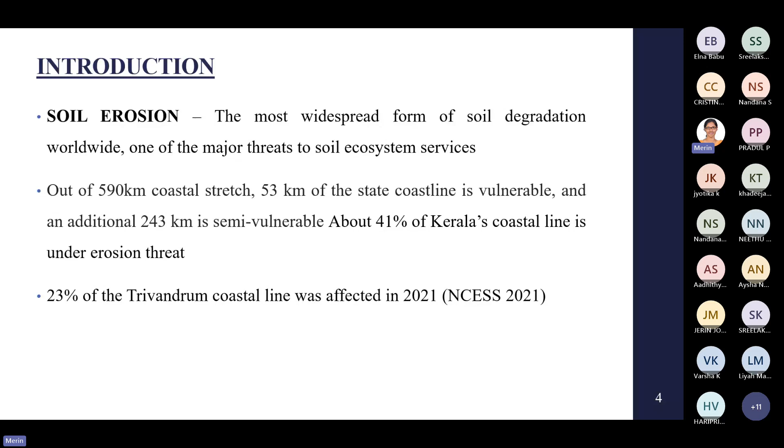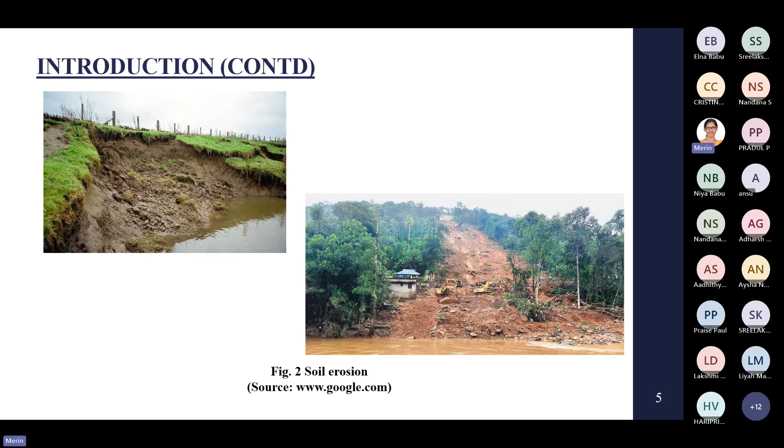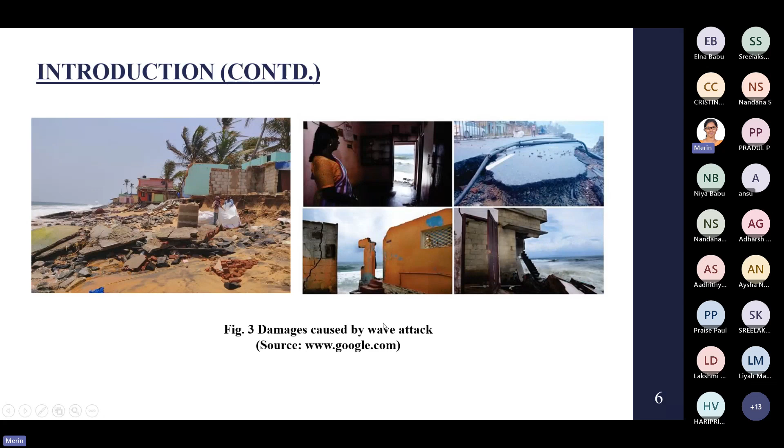Okay, firstly, when we're carrying out a study, we have to look onto reliable data. So even in our Kerala government website, we can see various erosion data, landslide data. We can identify the hotspots, like erosion hotspots and the areas which are prone to landslide, flood, drought, etc. Even in the Kerala website data itself, you can identify them. Or further, if you have to develop your studies more, you can rely on other software like GIS and so on, in order to map the locations accurately.

Okay, so the first step of doing research is actually you have to look onto data and then you have to identify the gaps. Gaps are actually what you use to develop your work. When you go through the literature, you'll get familiarized with how the works are being carried out, and then, referring to them, you can identify the gap. Suppose a particular work has been conducted in maybe the northern side of our country, then we can think of how we can adopt that in our particular region. Will it be possible? All those possibilities you can analyze. That is actually the basic step of identifying gaps.

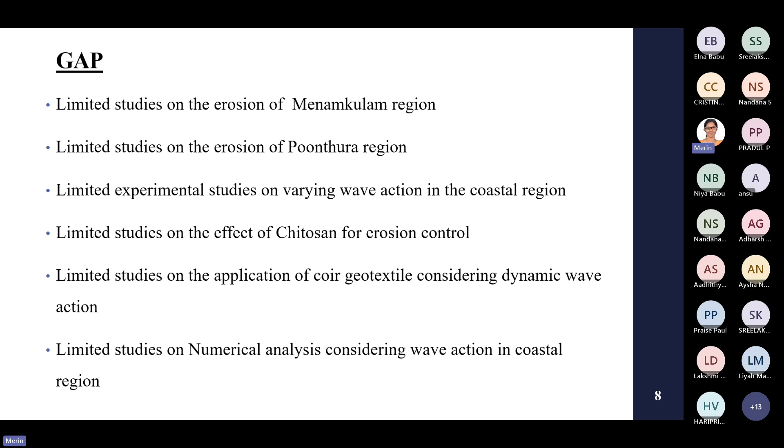So when I carried out this literature study, I came across various gaps, and these are the gaps that I have identified. I have selected two regions for my study, that is Menamkulam and Poonthura region. Both are in the Trivandrum district itself, and I have carried out my experiments on those two regions. Also, I have analyzed the effect of varying wave actions in the coastal region, the effect of chitosan and how it can minimize the amount of erosion, and how coir geotextile can be applied in order to reduce the erosion. And then numerical analysis. Numerical analysis basically is how you carry out a study with the help of software. Okay, so based on my gap, I have identified the objective also.

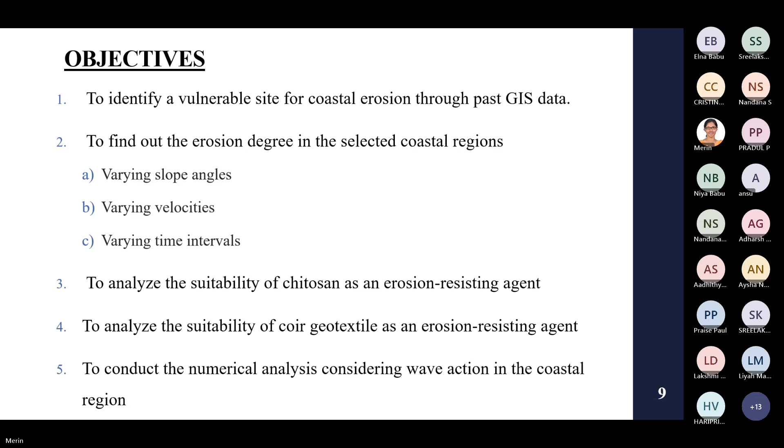Now, the materials used for my study. I have taken two soil samples from two different regions. Then chitosan. Chitosan is actually a byproduct of the fishing industry. If you want to purchase it, you can purchase through Matsyafed, which is part of the fisheries, the Kerala government itself, or any other ways you can purchase the chitosan. And then coir geotextile; you'll all be familiar with coir geotextile because it is a natural product, and similar to jute geotextile, you can use coir geotextile. And then concrete mattress; it is a mattress made of concrete. Its shape is in the form of a mattress.

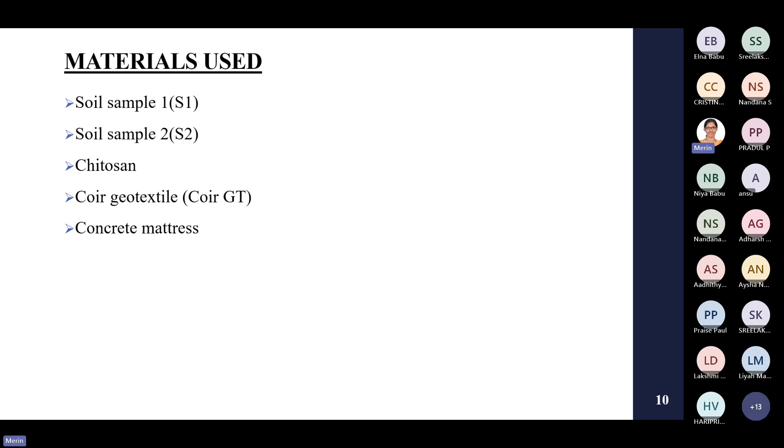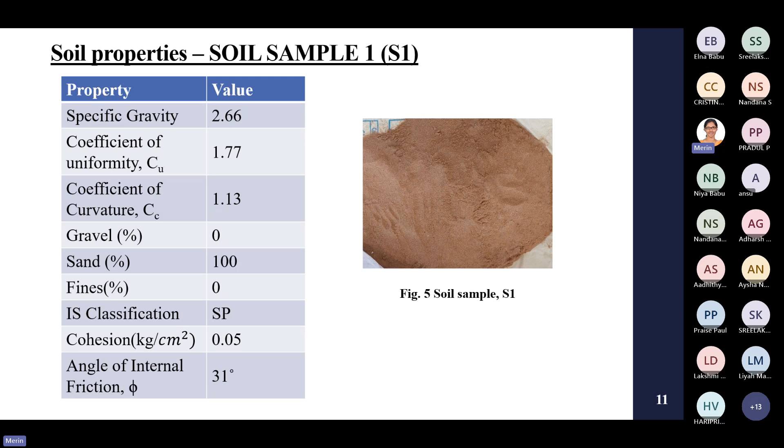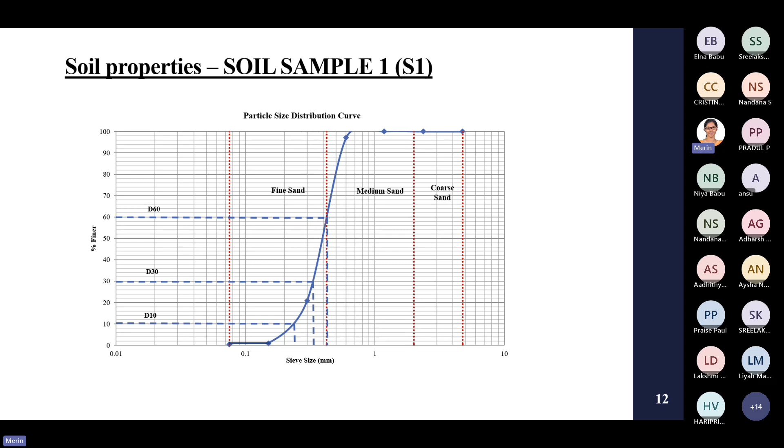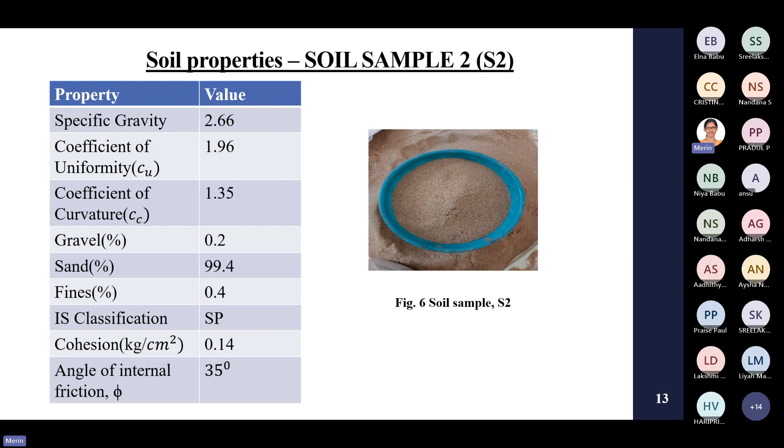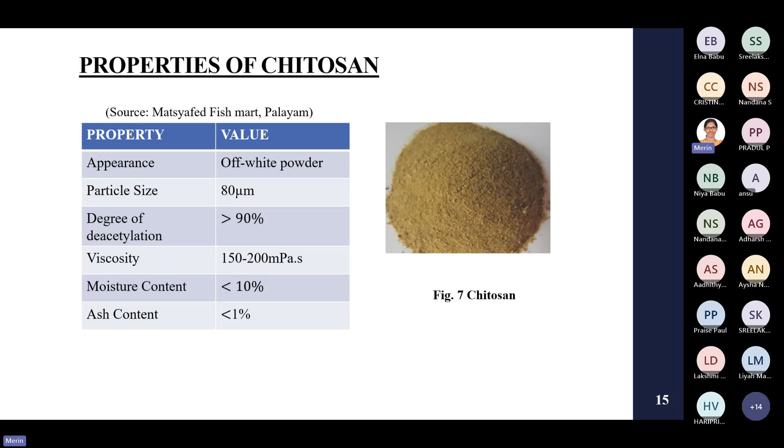So first, after identifying the gaps, you have to carry out the basic property tests, and then you have to select your materials. And for the materials also, the basic properties should be analyzed. First you have to plan your work and how you have to carry out the work. On the basis of that, you have to carry out the different tests which are required for the further completion of the work.

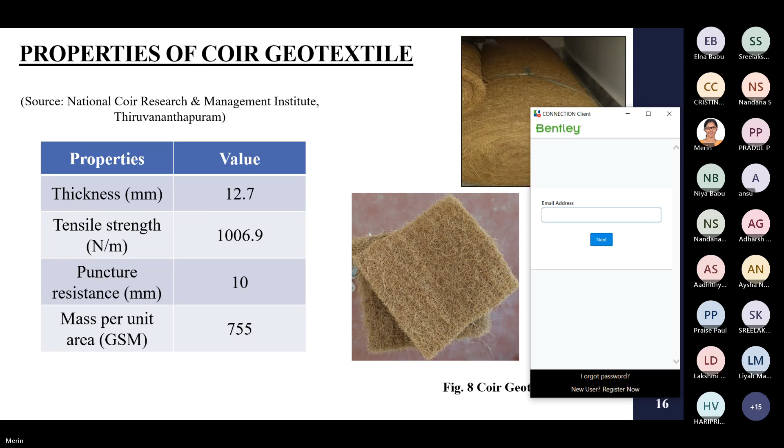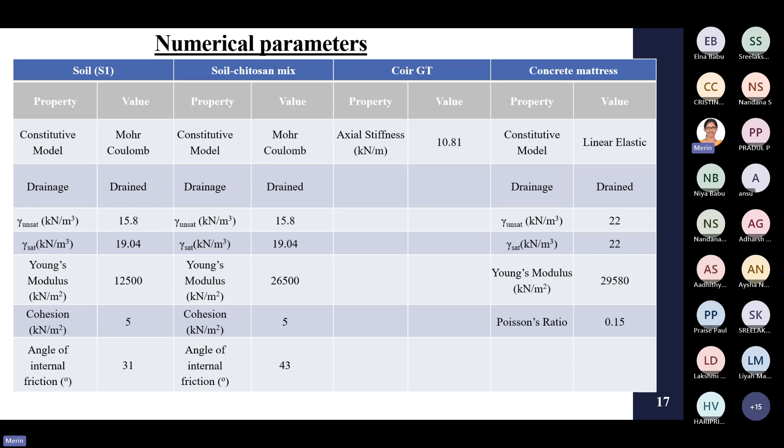Even in the work that I have done, because my college was situated in Trivandrum district, I have chosen the Trivandrum area. So similarly, you can also vary your work according to your availability and requirement. Okay, so after identifying the problem, you have to collect your materials required for the work, and then you have to do further property tests. And then if you're having any test setup, you have to prepare that. Otherwise, just follow how your work is being carried out. That way, just lead your work.

And then, since my work was based on erosion, I found out the erosion degree in untreated soils. And then the next stage was to find out the erosion degree in treated soils. Then I have completed my numerical analysis.

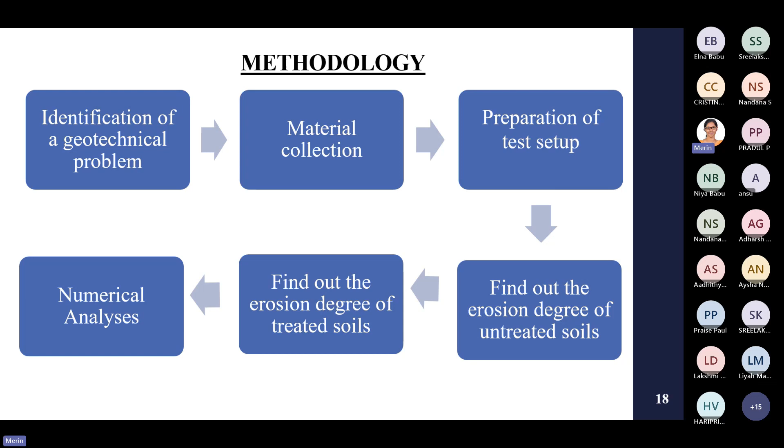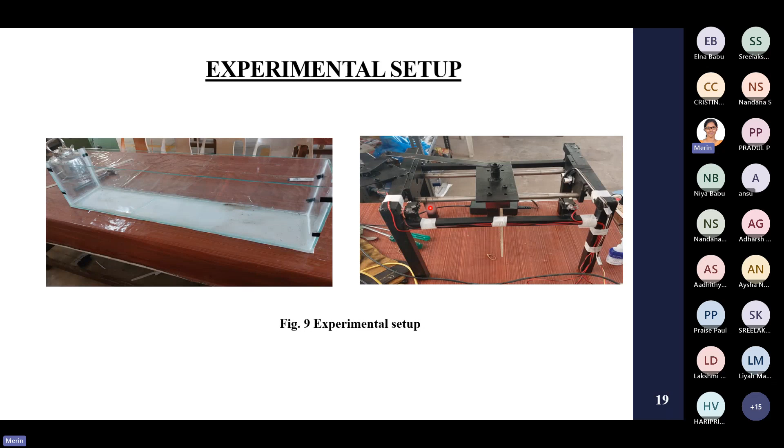And the basic methodology: I am filling soil in slopes. I have selected 3 slopes, 30, 45, and 60 degrees. Those 3 slopes I'm filling in the apparatus initially, and then I'll be filling water also. After the whole preparation of the soil and filling the water, I'll be switching on this motor, and then it will be moving back and forth, generating a wave. And that wave is used to analyze how the soil is being eroded away.

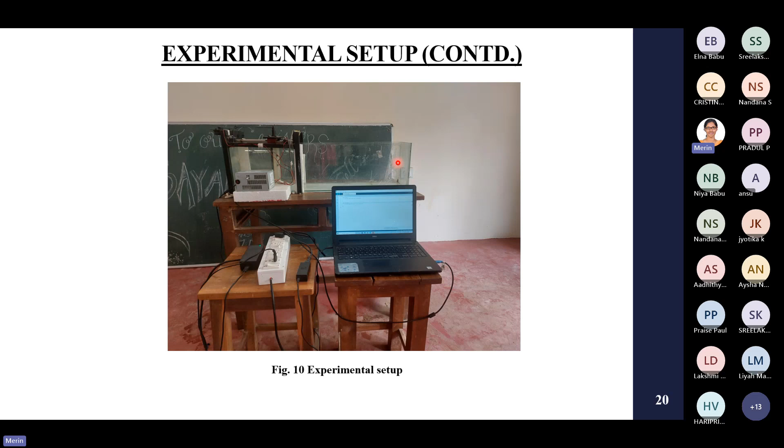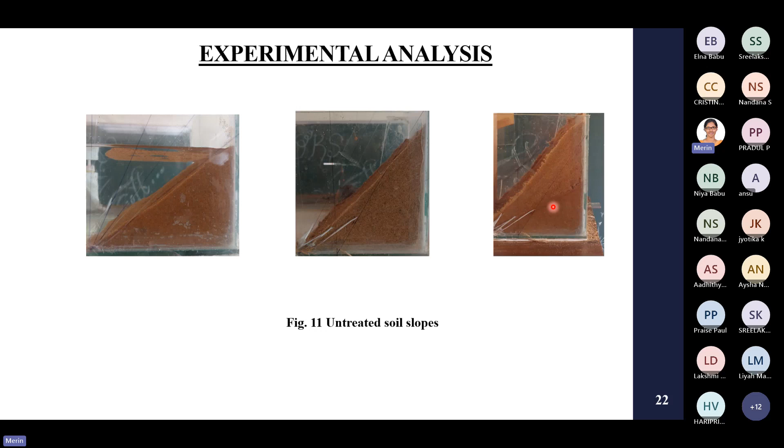So after doing the untreated studies, I moved on to treated studies, to obtain a comparison. After finishing the untreated soil samples, I moved on with the chitosan treated soil slopes. The chitosan which I showed you before was mixed with the soil sample in an optimum percentage. In any case, the optimum content is found out to make it more economical.

We have to obtain more strength, and whatever product we are using should also be economical. So that is why we are adopting the optimum percentage. I hope you are aware of the compaction curve. At the optimum dosage, the strength will be more, and if it is beyond that or lesser than that, the strength will be less. So identifying the optimum percentage is very important when you're using admixtures.

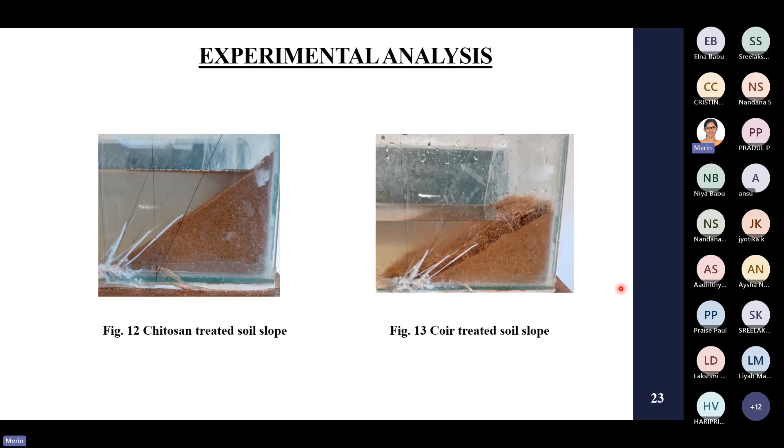Okay, when you are carrying out a work, you can also refer to any basic data. From that data, you can identify the field or the location where you have to carry out your study. Okay.

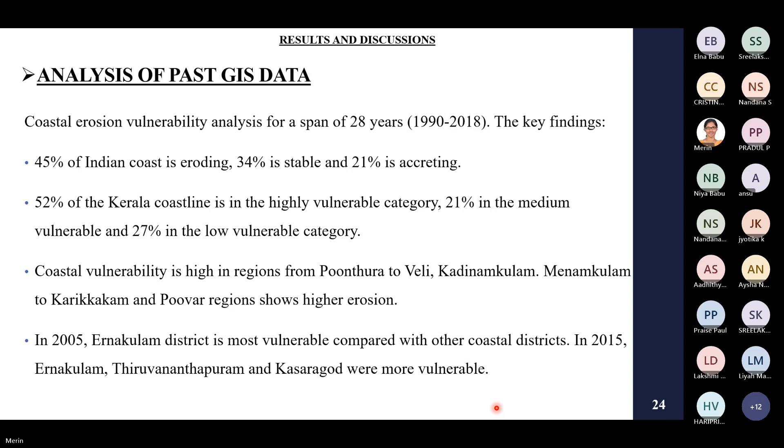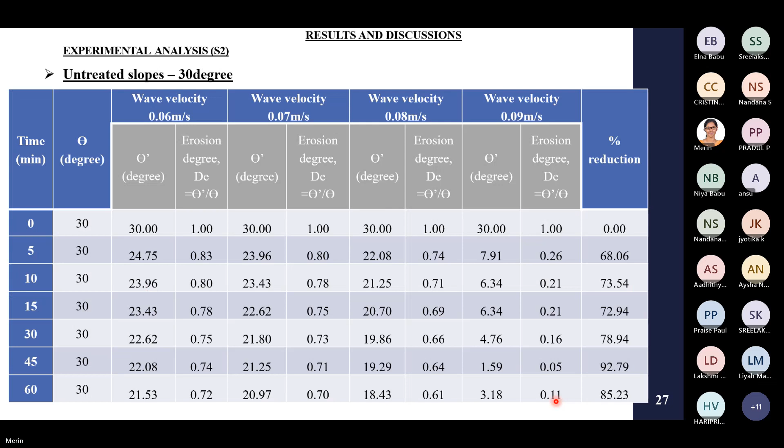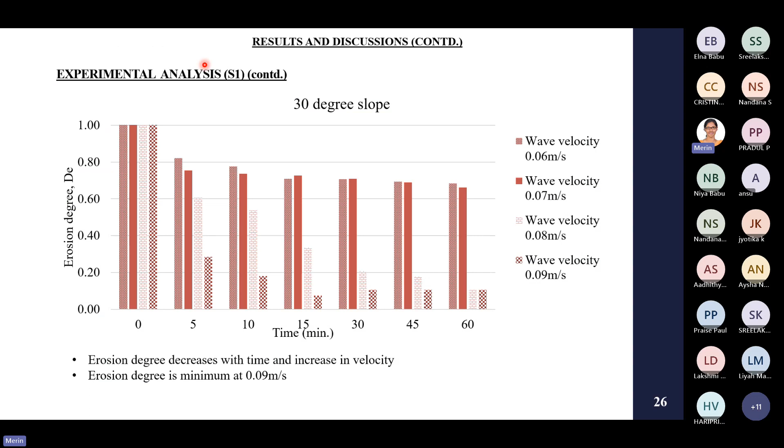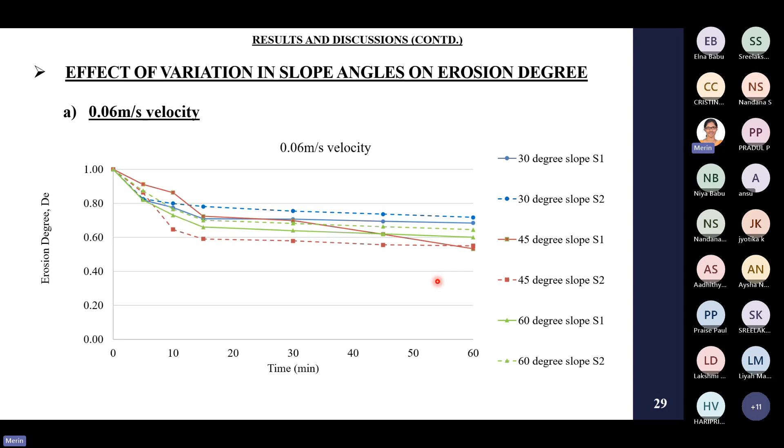And similarly for 0.07, 0.08, and 0.09. So we can see that as the velocity is increased, you can identify how much the degree of erosion is increased.

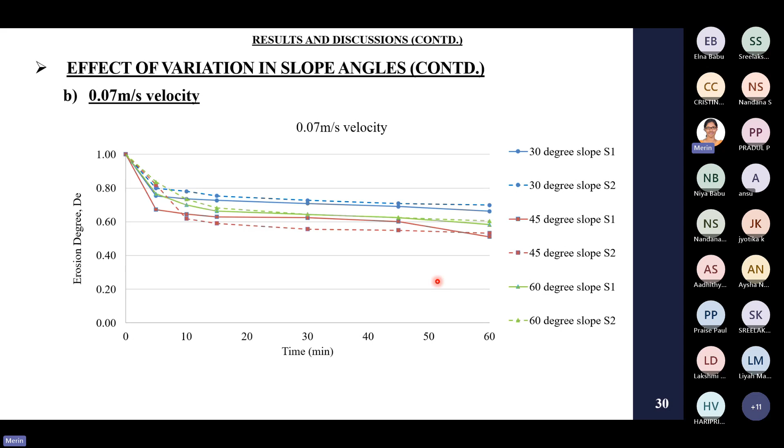Actually, the fact that I observed while carrying out my experiment is that 0.06 and 0.07 were showing similar results, and 0.08 and 0.09 are showing similar results. Also, in my study, I came to identify that the S1 soil sample, that is the Menamkulam soil sample, was more prone to erosion. It might be due to variation in properties. Actually, the cohesion and frictional angles of the S2 sample were higher, so it offered better resistance against erosion.

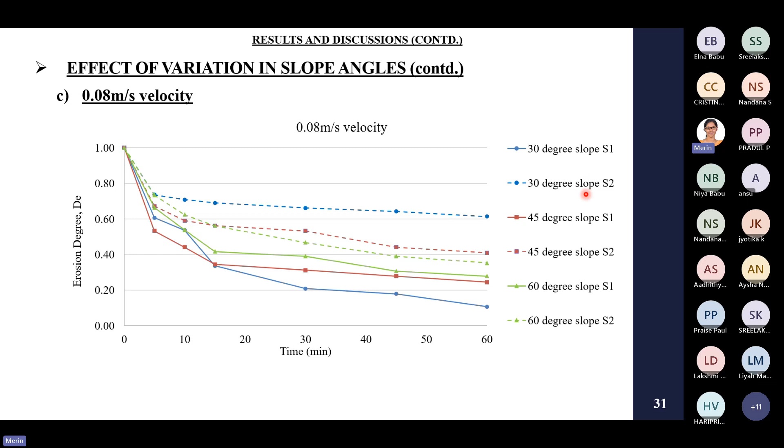So when you are also carrying out various works, you will be able to identify how different samples are reacting to different components, different admixtures, etc. Even if you are carrying out an entirely different study, like strength tests or load characteristics and so on, even then you can see different samples react to different components in different ways. So you can come to a conclusion on how a particular sample will behave. You can identify all those things.

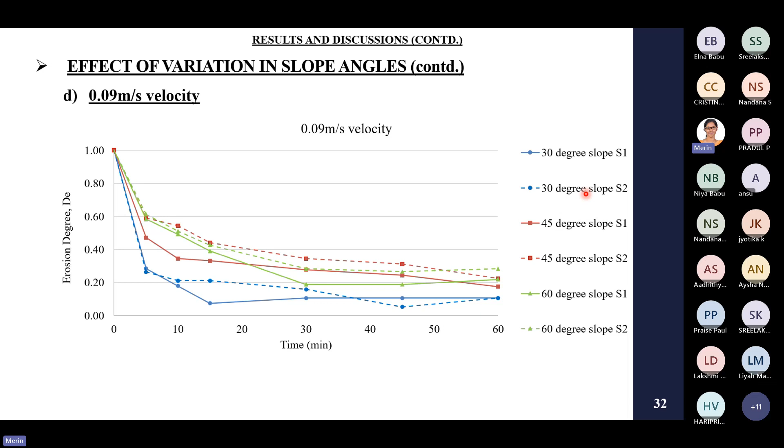Okay. So first you identify your problem, then you move on to how you have to execute the project or the work, and then you have to identify how you have to tabulate your result. From a single experiment itself, you can come to different conclusions. I told you that I just relied on a simple method of testing, but from that simple method itself, I have obtained various kinds of conclusions. So that is how you have to learn. You have to interpret your data in different ways, so it will be easily understood both by the observer and ourselves.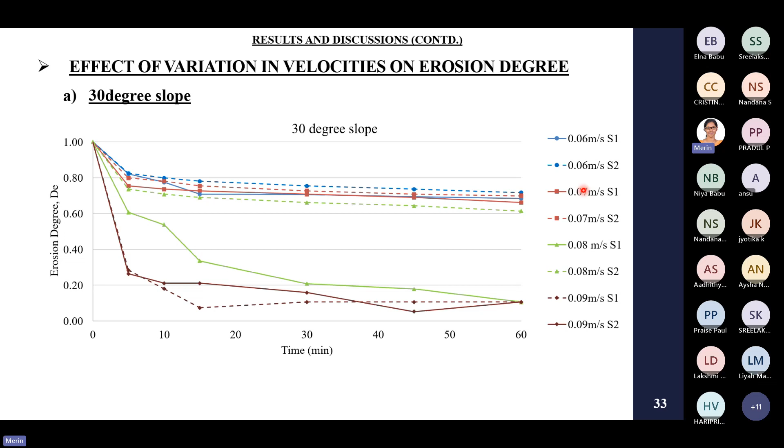Okay, so before I showed you how the soil samples react to different velocities, and this graph explains the effect of velocities on different slopes. In the 30-degree slope, you can see how all these velocities and soil samples are behaving, and similarly on the 45-degree and 60-degree slopes.

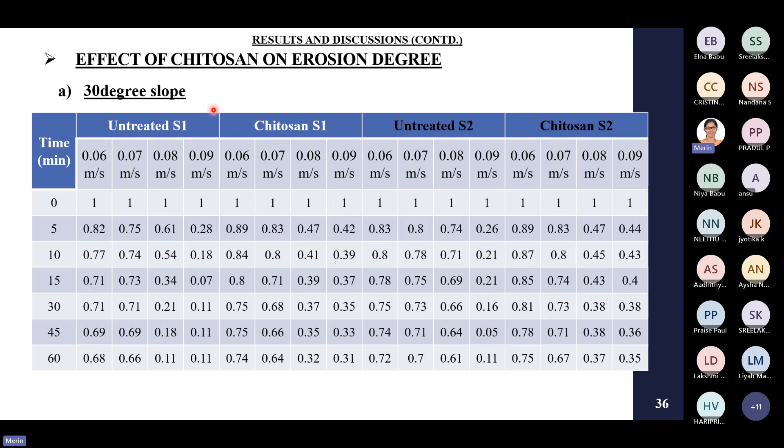Now, after completing the untreated studies, I moved on to the studies using additives, that is chitosan and coir geotextile. So this is also a comparison. You can see that in the extreme case, that is 60 minutes at the peak velocity, initially the value was 0.11, and when I used chitosan, it increased to 0.31. Similarly, for the S2 sample, 0.11 increased to 0.35. Hence, in all the readings, you can see there is an increase. So we can conclude that chitosan is actually offering better resistance to the soil sample. Similarly in the 45-degree and 60-degree slopes.

Okay, after chitosan, the next set of experiments I had to do was on coir geotextile. For coir geotextile, we can see the initial value was 0.11. When I used the coir geotextile as a soil cover, the values increased to 0.66. That is almost 6 times improvement. Here also we can see 0.73. So this 6 times improvement is observed in the extreme case, so all the other data will be above that. In the extreme case itself, coir geotextile provides a 6 times improvement.

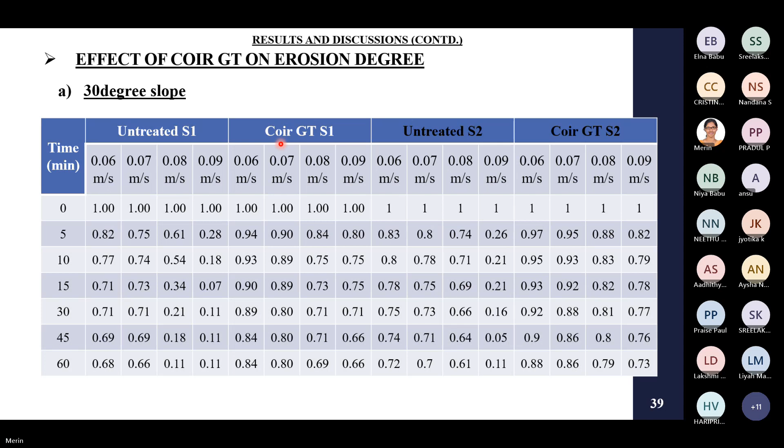So we can understand that coir geotextile is actually a very good option in reducing the effect of waves. Similarly for the 45-degree and 60-degree slopes. Now this is comparative data. In the first table, you can see untreated soil samples, then chitosan 3-day.

I told you that we can try out different trial and error methods. During my experiment, initially I mixed the chitosan with the soil and used it directly. But I also tried another method, where I mixed the soil sample and kept it for 3 days, similar to the curing period you all will be aware of. I came to understand that there is a very good improvement in the values. In the S2 soil sample also, the values improved when I waited for a period of 3 days.

I already mentioned that chitosan is a biodegradable product. It is obtained from the shells of shrimp, crab, etc., so it is safe to use along with the soil. Coir geotextile is also a natural product; it is very safe to use, and it is also easily available. Okay, so you can see the improvement of values.

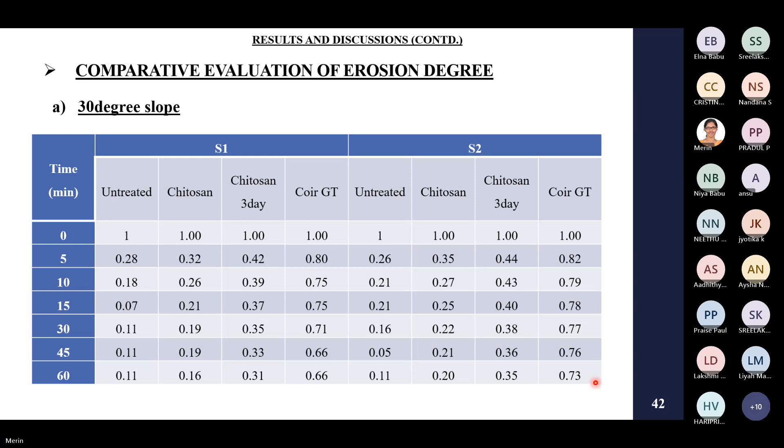And this is just a graph. If you look into this graph, you can see this is the initial soil samples. And after using this product, we can see the value is actually much higher. So all this amount of soil we are actually saving. So the amount of soil being eroded away is being reduced.

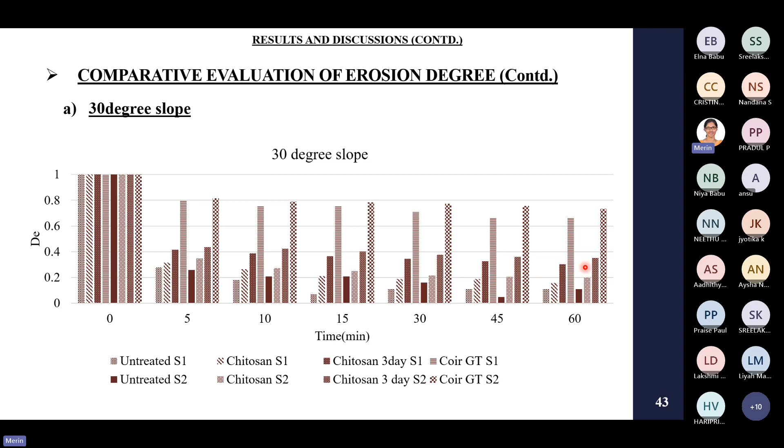Okay, now this is in the case of 45-degree. And this is in the case of 60-degree. So in the 60-degree case also, we can see there is a very good improvement.

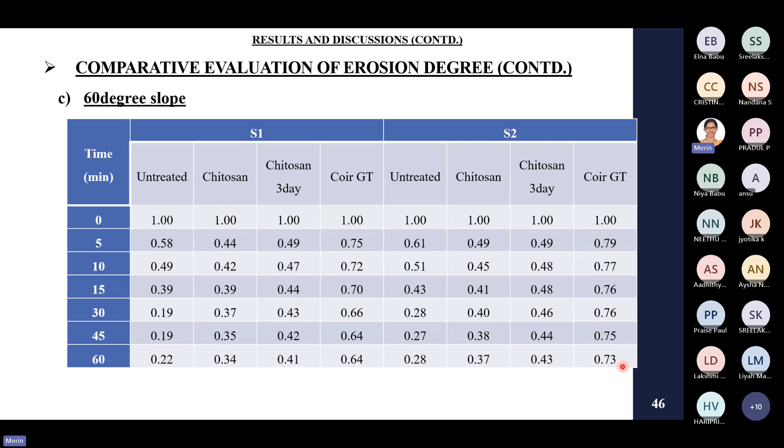Okay, so that was all about my experimental study, and this is numerical analysis. Why do you have to conduct a numerical study? Because in experimental studies there will be many limitations. Even though I try to replicate the field conditions of a coastal region or a beach side, it is very difficult. You can imagine how big the coastal region is and how small the laboratory is. So exact replication is a very difficult task.

So in those cases, when it is difficult to replicate all these field conditions, you can adopt numerical studies. Numerical studies will help you develop various kinds of results, and various numbers of results you can develop from a numerical study. But the only thing is that you have to properly identify how the method is being carried out in order to use it for a numerical study.

For numerical purposes, if you are using structural software, there are various softwares like STAAD.Pro and ETABS, etc. The software that I used is Plaxis, Plaxis 2D. Plaxis is a software which is used for geotechnical soil-related studies. You can find out the bearing capacity, settlement, pore water pressure, and many parameters from these numerical studies. That is a very big advantage of numerical studies.

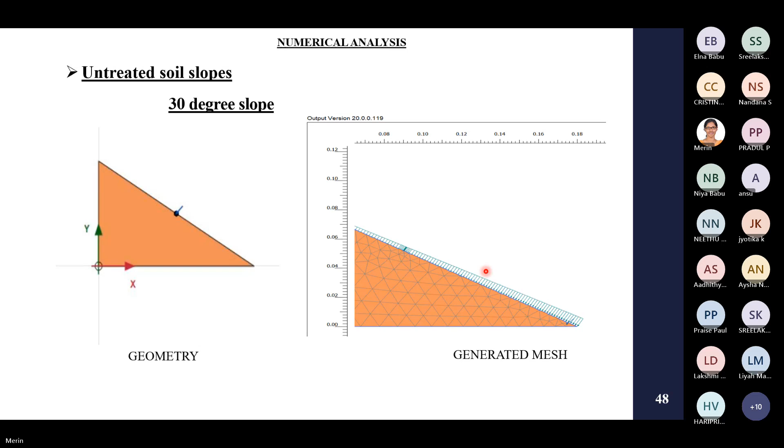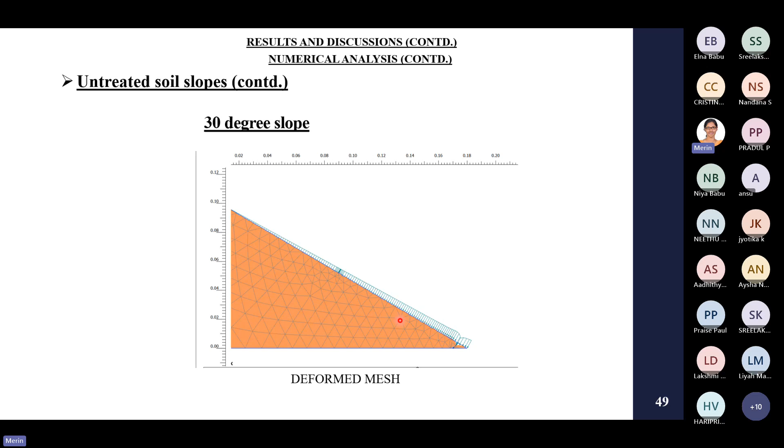Okay, so in my case, I developed the 30-degree, 45-degree, and 60-degree slopes in the Plaxis software. You can see this is the geometry similar to the experimental setup I developed, and this is the mesh generated. Mostly all numerical softwares are based on these meshes. So this is the deformed mesh, and this is the untreated soil. For this soil we can input those parameters; I have already shown you them before. You can input those parameters and simulate according to various wave conditions, various time intervals and all.

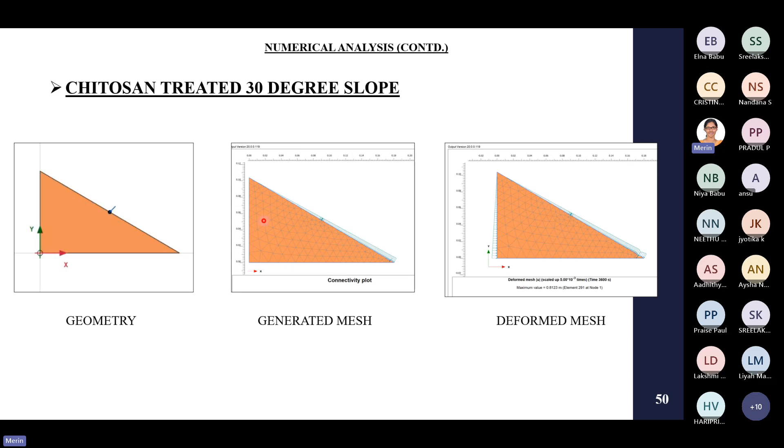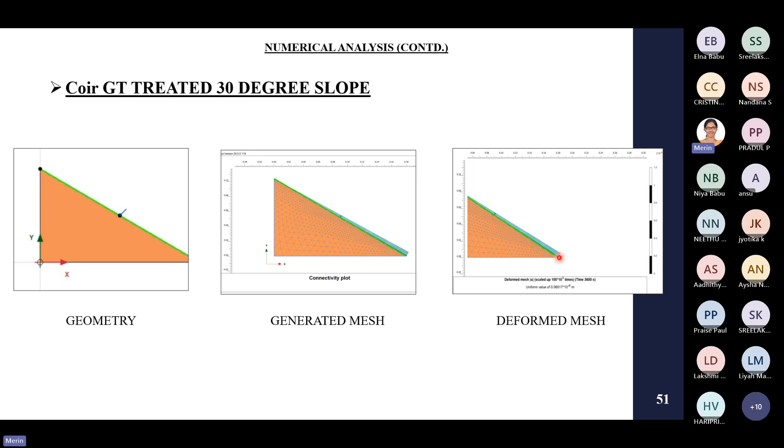Okay. Similarly, for chitosan, since I mixed the chitosan along with the soil in the experimental study, here also I used the soil-chitosan mix properties. And for coir geotextile, similar to the experimental setup, I have modeled it as a geotextile. You can see that, and you can see how the slope is behaving.

Now this is the proposed concrete mat. Actually, I couldn't do this for my experimental study; only a numerical study I've carried out for the concrete mattress. As I already mentioned, the concrete mattress is an impermeable mattress, and it will be laid similar to the coir geotextile itself. You can lay this on the shore region, or wherever you want to protect the soil from the action of water.

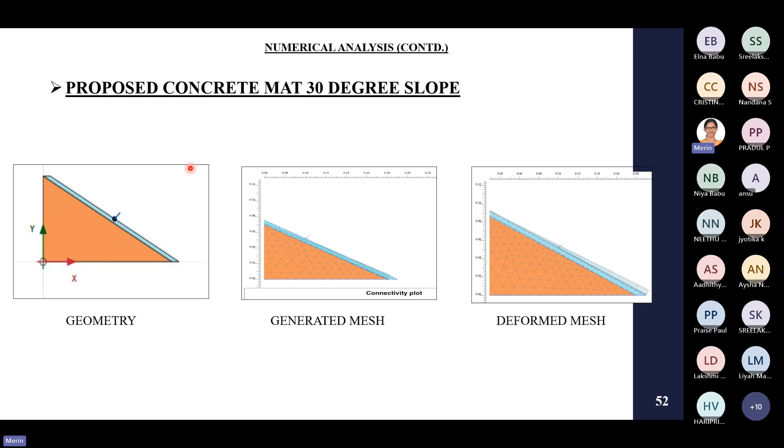And actually, when I carried out my numerical study, I came to a conclusion that the concrete mattress was providing better resistance against soil erosion, even compared to the coir geotextile, because it is concrete, and it will definitely provide a better result. But you have to think about the sustainability and the economical benefits and all. That's why I am preferring coir geotextile. Now similarly, all these slopes I've modeled. So this was basically my study.

And the conclusion that I came to from my study was that the identification of the regions for my study, I have obtained through GIS data analysis. When you are doing it also, you can carry out different studies and then come to a conclusion. Then I found out that the erosion degree of the Menamkulam region was found to be lower than that of Poonthura. That is, the first soil sample was more prone to erosion compared to the second sample.

So even in your case, when you're carrying out a work, even in your BTech final project, you will have to carry it out in different ways, and then you can compare. Like if you're selecting two samples, you can compare which is offering better resistance or which is having more strength, and all those properties. Even basic parameters like permeability or strength characteristics, all those you can compare.

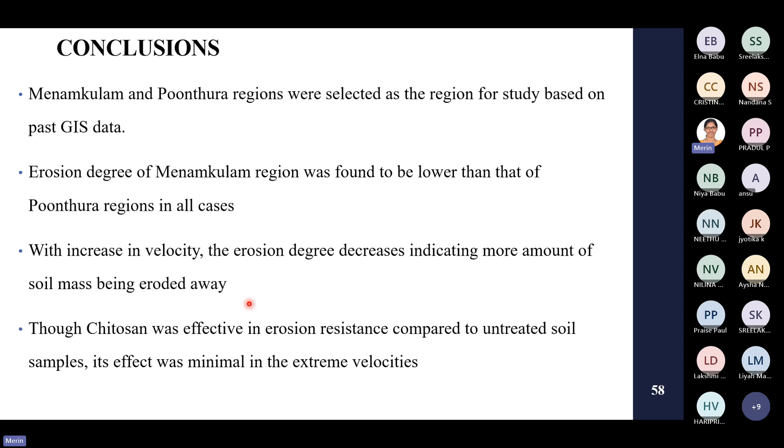And then velocity. We can see that as the velocity is increased, more soil was being eroded away. Now, from all those data, the best method that I came to conclude was coir geotextile, because it was offering more than 60% erosion resistance in all the cases that I considered.

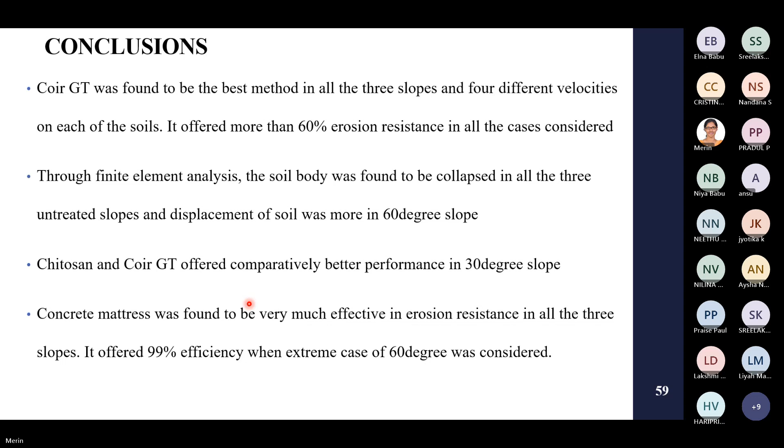Now the scope for future work. Actually, I have selected only 2 regions for my study, and only 2 or 3 methods. So this same procedure can be extended to different field soils, or by varying different parameters, or by using different kinds of additives. Like instead of chitosan, you can use various other biopolymers, or any other additives. And other than the coir geotextile, you can use coir in different forms like coco logs, coco pits; different products are available. You can try using that also.

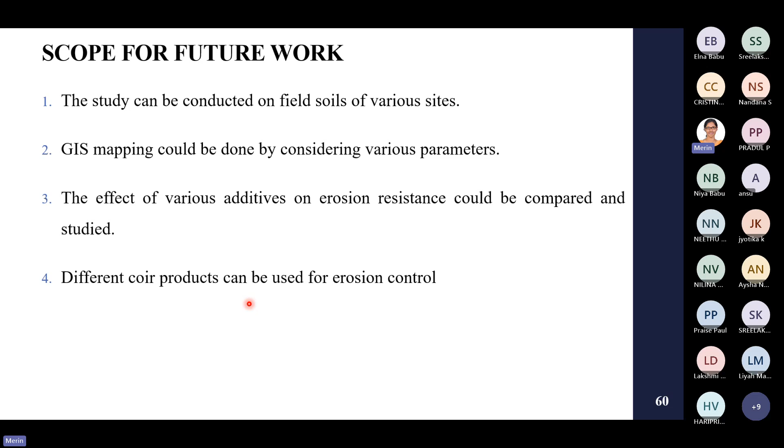And similarly, when you have to do a work, you can refer to your seniors' or any other works, and then you can identify the gaps. In all the works, there will be some areas that are missed out. You can refer to that, and incorporate that into your work. Actually, research is something that is continuous. It is not something that you're doing just for your final semester and then dropping it. It is not like that. You can refer to previous works, try it out, and bring out various methods and suggestions, and that is also a new work.

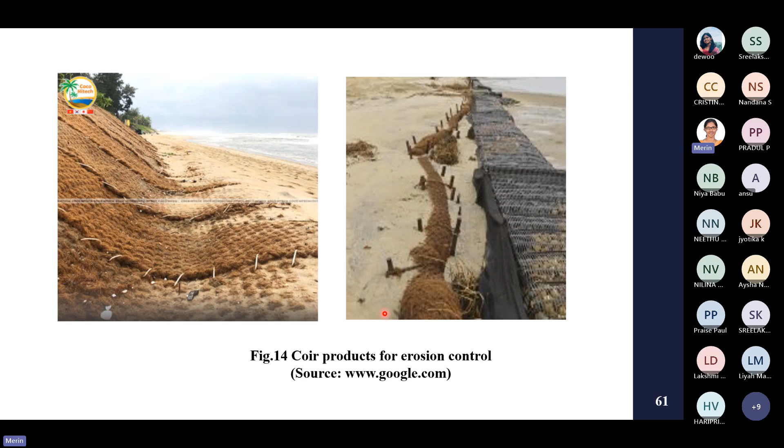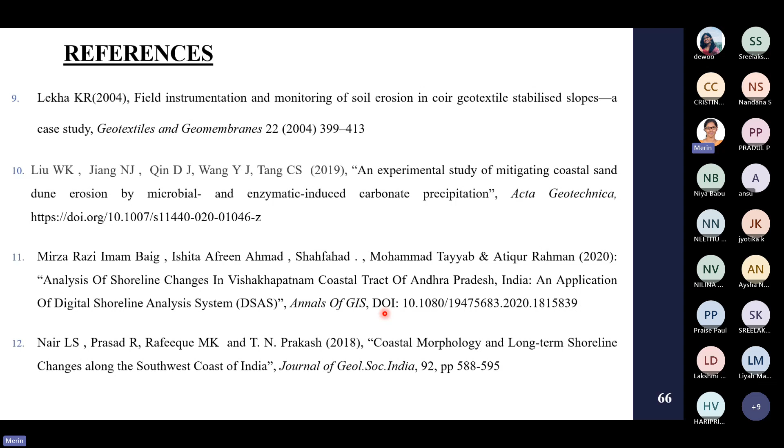Okay, and thank you. So I hope you all have got an idea of how to carry out research work.